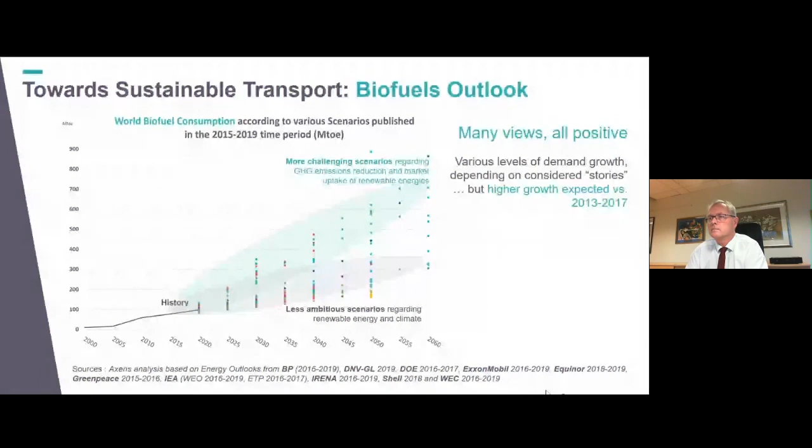That is one challenge on one hand, and global warming on the other. Keeping these challenges in mind, our eminent speaker in the earlier discussion highlighted that India is poised to become the third largest consumer of fuels in the coming decades, and needs to address these challenges I just mentioned. The government of India plans to increase biofuel production by 2030. At the same time, there's a strict target to reduce greenhouse emissions by around 30% in the next 10 years or so.

Some agencies have worked in this area and highlighted that only an energy mix combining fossil fuel with renewable fuels will be able to meet this demand in the next couple of years, or the next decade to come. If we look at different scenarios projected in the slide, even the most conservative scenario shows that renewable fuel will play a vital role, not just in achieving the energy demands of this country, but also in reducing the overall greenhouse emissions you normally have with fossil fuel based pathways.

Numerically, it looks quite encouraging. However, there are a number of challenges which some eminent speakers in the earlier discussions highlighted, cost effectiveness is one of them, feedstock availability and flexibility are other ones, and many more. To achieve these goals, it would definitely be required to have an approach or pathway which is innovative, cost effective, as well as sustainable.

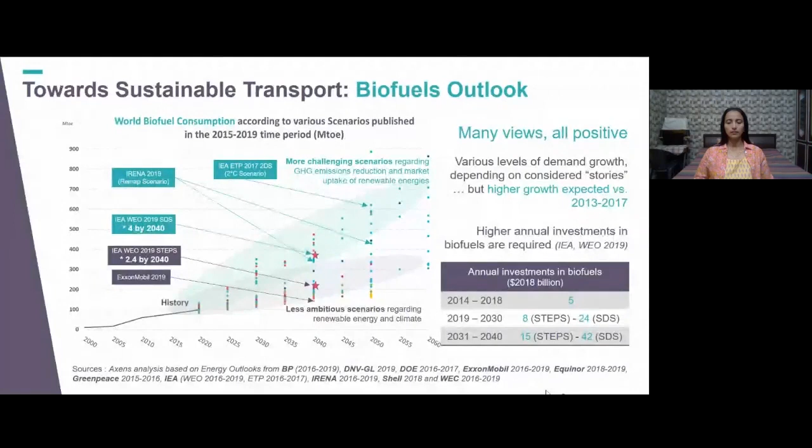If you remember during the last session, Mr. Das highlighted how important sustainability is for such pathways. So keeping these goals in mind, Axens has developed and expanded its bio portfolio over the last decade or so to provide a sustainable solution. It's important to have a solution which is sustainable.

This is a quick snapshot of Axens' bio portfolio, where in the next 30 minutes or so we will look at different pathways to utilize different feedstock, whether they are solid like biomass or liquids like used cooking oils, tall oil, or residue from the food industry or fish industry.

Now, if we begin from the top, we have two processes which produce renewable diesel and aviation fuel, which we call sustainable aviation fuel. The first of them is Vegan—this is a more traditional route, hydrotreatment of lipid feedstock into diesel and jet fuel, which is quite well known in the oil and gas industry. The second approach is the BioTfueL project, including Gasel. This is actually a thermochemical conversion of lignocellulosic biomass into liquid fuels like diesel, jet fuel, and some naphtha. This utilizes gasification and Fischer-Tropsch units to carry out this conversion.

Now, the third process that we'll look at today, and some of the speakers already highlighted during today's discussion, is lignocellulosic biomass conversion into cellulosic ethanol through the enzyme route, which is actually a biochemical conversion. We call this process Futurol.

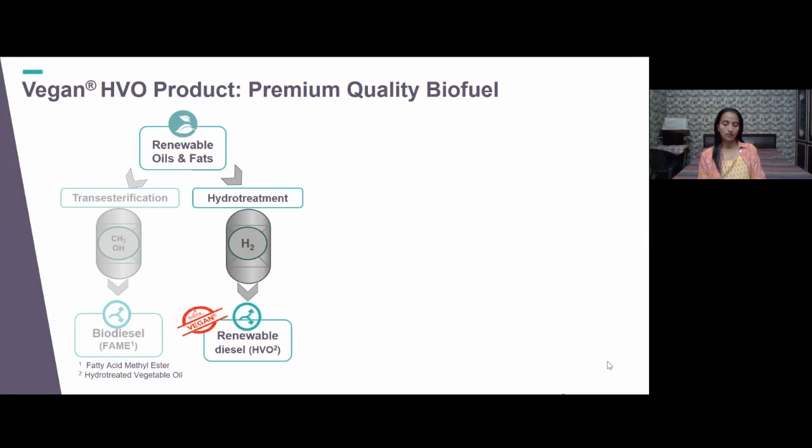Now, this is a big challenge because it means you cannot blend this diesel more than 5, 10, 15, or 20%. There is a limitation to it. And that is why this other route is gaining more prominence, especially in Europe and US, where a lot of refineries are switching from fossil fuel based pathways to biorefinery. This is one of the pathways which is quite proven, already commercialized, and very well known in the market, so there is a lot of know-how available. What it really does is the lipid feedstock undergoes hydrotreatment to produce renewable diesel like HVO, which is also known as hydrotreated vegetable oil.

Now, some of the quick advantages I would like to mention here: it is oxygen free. These are C16 to C18 paraffins, so a very similar molecule in terms of traditional diesel molecules. Then higher energy density because you are adding hydrogen into the process. And it has tunable cold flow properties. I think cold flow properties are quite important when we talk about commercial scale fuels, whether it is summer, winter, or Arctic diesel.

So traditionally in biodiesel you need to add some additives, but in this process, even just by changing the operating conditions, you have a finished product with the required cold flow properties. Finally, I'll not go into each of them, but I just want to say that higher cetane number is something that is quite useful here, because it brings a lot of value when you are blending it into a diesel pool that you already have.

So it's a very superior property that you get here. Now, quickly look at how that translates into chemistry and scheme of things. I'll not go into details, but I just want to highlight how we have made this approach cost effective.

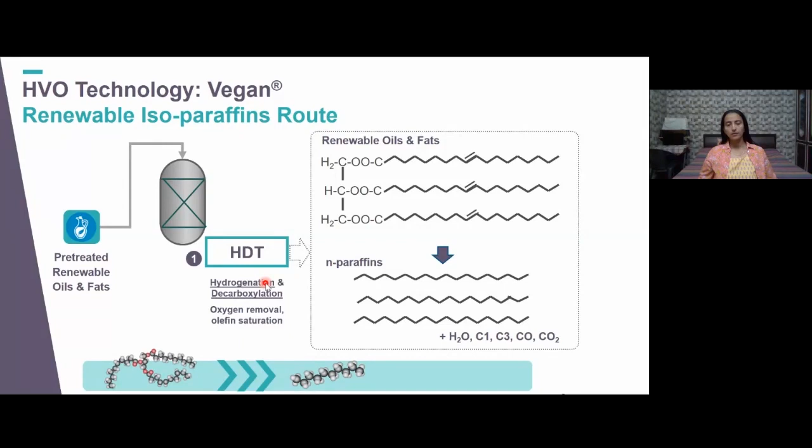Now, how does that translate into the scheme of things? You have a pre-treated renewable oil or lipid feedstock, like used cooking oil. You hydrotreat it in a hydrotreating reactor, then you have a hydrotreated oil. Now, because the melting point of this oil is more than 20 degrees Celsius, it doesn't fit the specification you need for aviation fuel or diesel, so you have to upgrade it further through hydroisomerization.

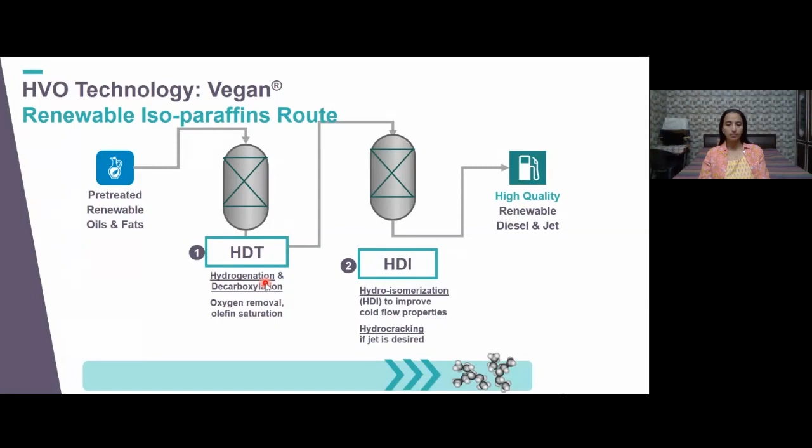Again, there are two approaches to it: one is hydrocracking and another is isomerization. We have chosen isomerization because it produces less yield of gases, which means you can maximize your yield for the main product. This way, again, it improves your OPEX and reduces your CAPEX.

Eventually, you get a product which is ready to use. It doesn't need any post treatment. You can straight away use it in the existing setup. So it's a drop-in fuel.

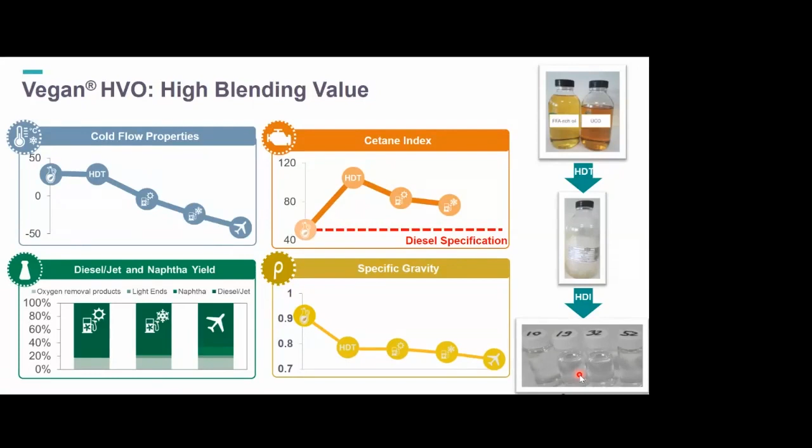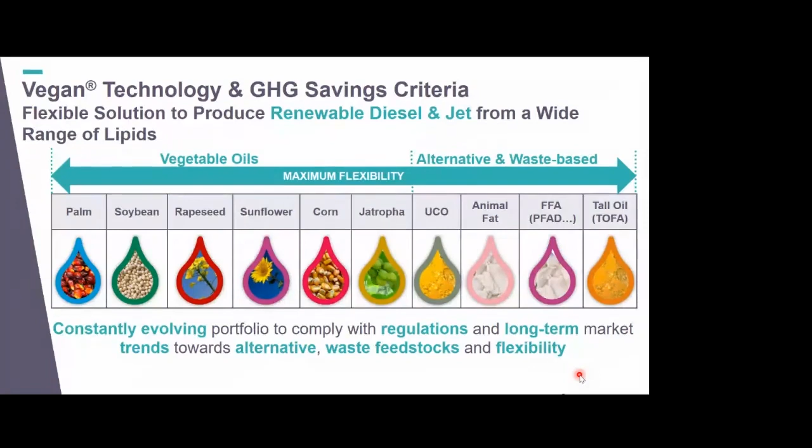Now, this is a quite important slide because this process is quite versatile in nature. What it means is you can use multiple kinds of feedstock, different feedstock available throughout the year, to produce different products: diesel, gases, or jet fuel. So it gives you a lot of flexibility. Even capacity flexibility is there, so you can pick and choose what capacity you want based on feedstock availability. So it's a quite flexible and versatile process.

In terms of our experience, one of our commercial references is at Total La Mède Biorefinery. This is in France. The important thing to note here is this is the only refinery, as per the press release by Total, that made profit for them during the lockdown period. So this tells you how this bio route can bring a lot of revenue for you.

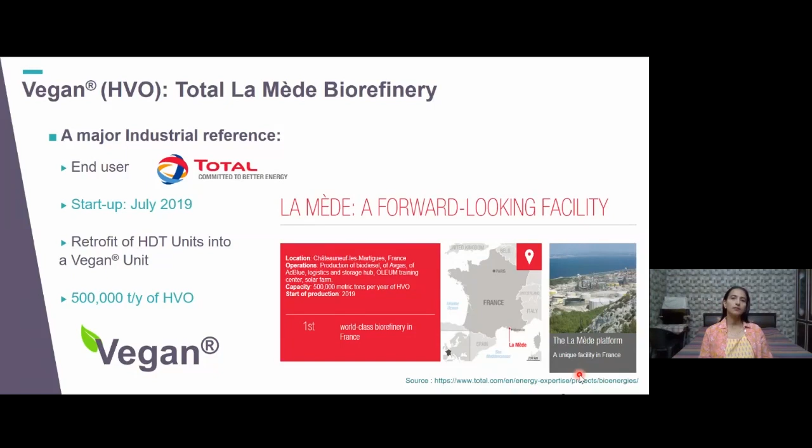At the same time, we had to consider that in Europe and US, they have a lot of incentives when they adopt such a route. Some of our other references are in Poland and very recently Repsol in Spain. So as I said in the beginning, this process is quite proven, quite well known. Only some modification needs to be required so you can use it in the existing setup. You can also consider co-processing, or you can put up a grassroots plant for this particular process.

Now, quickly moving on to the other process to produce renewable diesel and jet fuel, which is the BioTfueL project, including Gasel.

Now, I'm sure this is more relevant to fuel.

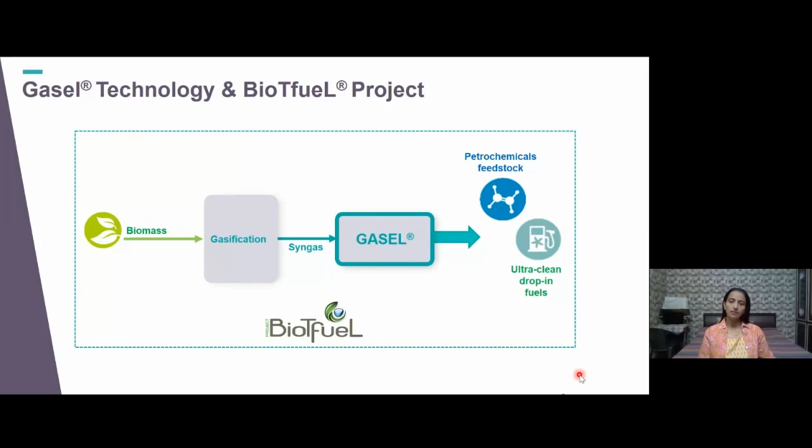It's a complete value chain from biomass conversion to liquid fuels. So what it means is it involves pretreatment, gasification, syngas purification, Fischer-Tropsch synthesis, and then upgradation of the waxes that you get from Fischer-Tropsch. Again, it's a very versatile process.

When I say that, I really mean it, because here you can use biomass. We are also exploring and testing the technology with waste feedstock. Coal and pet coke can easily be used. At the same time, if you have a choice, you can also use natural gas. Then you generate a syngas, which produces various kinds of feedstock and products like diesel, aviation fuel, and naphtha that goes into petrochemical feedstock. So it's again a very versatile project that we are talking about.

And in a nutshell, what BioTfueL really means is, you can see how extensive and massive this project is, because we are talking about more than 180 million euros of investment program for this project. Already more than 10 years of R&D effort has gone into development for this project.

We are using a partnership model. It's a consortium known as BioNext, and a partnership model in this area is quite common, where a lot of partners come in and bring their expertise to develop a process. So we have utilized the same, and BioTfueL is one of the end products of the same.

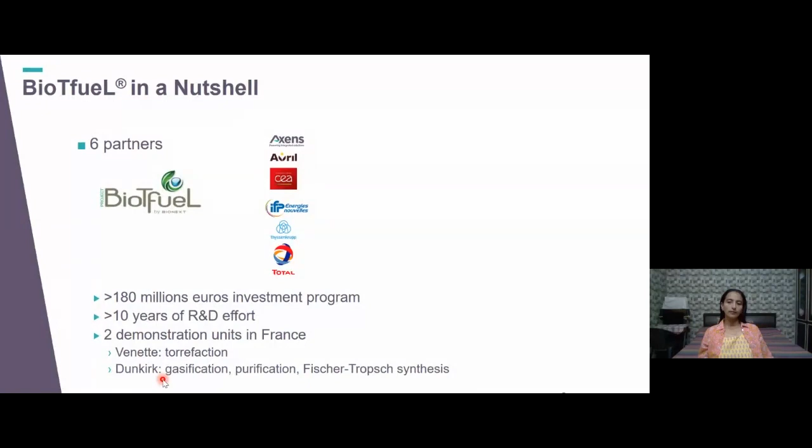These two demo plants are there to validate the technical and economical feasibility of this project. And through these two demo plants, the results are really good, and we were able to validate the results. Maybe in the coming times, you will see the commercial aspect of this technology as well. I mean, how that translates into the scheme of things.

You have biomass, you torrefy it, which is more like a mechanical drying. The intent here is to reduce the moisture up to a certain level. Then you have a pre-torrefied biomass, which looks more like coffee powder, just to imagine, it's a vague term. Then you take it to...

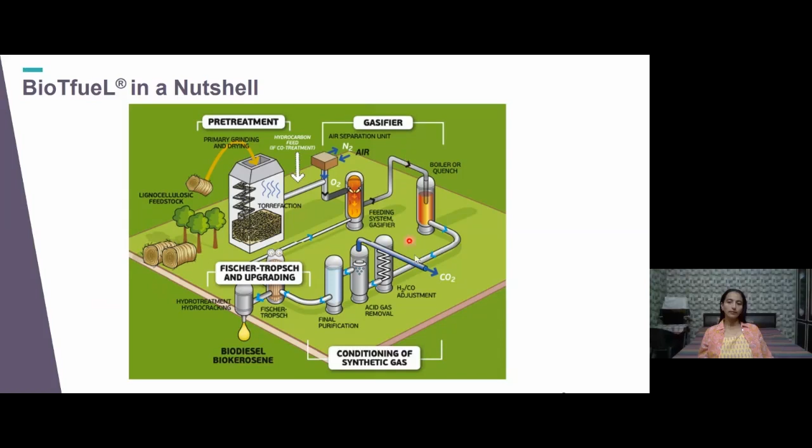the oxygen-fired gasifier. You produce a syngas. In the syngas, the next aim is to balance out the hydrogen to CO ratio, which you do through acid gas removal and final purification through catalysis or adsorbents. Then you take it to the Fischer-Tropsch reactor, where you produce wax to produce end fuels like diesel and jet fuel or naphtha. So this is the typical scheme.

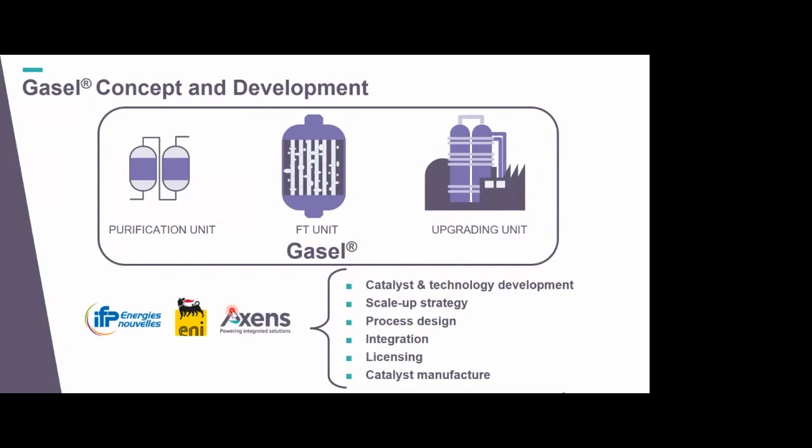I'm sure you must be wondering then what Gasel is, because I just spoke about BioTfueL. Gasel is actually the Fischer-Tropsch section. This covers purification of syngas, the Fischer-Tropsch reactor, and the upgradation of wax that you produce in the Fischer-Tropsch reactor. Again, this Gasel part of it was developed in consortium with ENI.

Now, how does that translate into the scheme of things? Well, Gasel actually utilizes a low temperature regime, which helps you maximize the wax yields. It's important to have wax because here we are targeting diesel and aviation fuel, most of it. And in case you want to target naphtha, that is also possible, and that can be adjusted through this hydroprocessing step, where you can mix and match based on what you really want as a product.

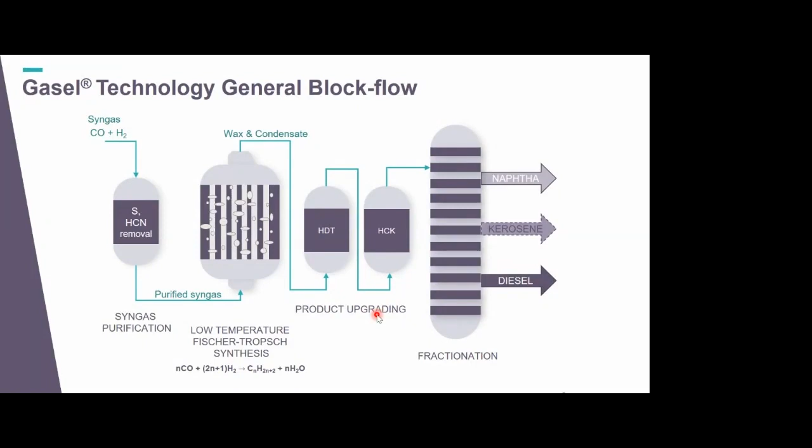Now, in terms of its properties, just to summarize the product you'll get, the products are fit to use, drop-in quality straight away. You can use them in the existing setup. No, they have no contaminants, no sulfur, no aromatics. Quite paraffinic in nature when I talk about diesel and kerosene, and meets all the required specifications for these fuels. At the same time, being premium fuel, that's one advantage.

Another advantage is it reduces greenhouse emissions up to 60 to 85%, based on the source of your hydrogen. That also depends on whether it is renewable hydrogen, blue, or gray hydrogen. So that varies between 60 to 85%.

Now, in terms of our experience, as I said in the beginning, we have 2 demo plants. On the left, you see a demo facility in France, Venette, and on the right side, it's downstream of torrefaction. This is a complete chain from gasification to fuel generation.

Now, the only thing to highlight here is you must be wondering why we set up a different torrefaction plant at a different site. The reason was we wanted to decentralize the whole system, because transporting biomass is quite expensive.

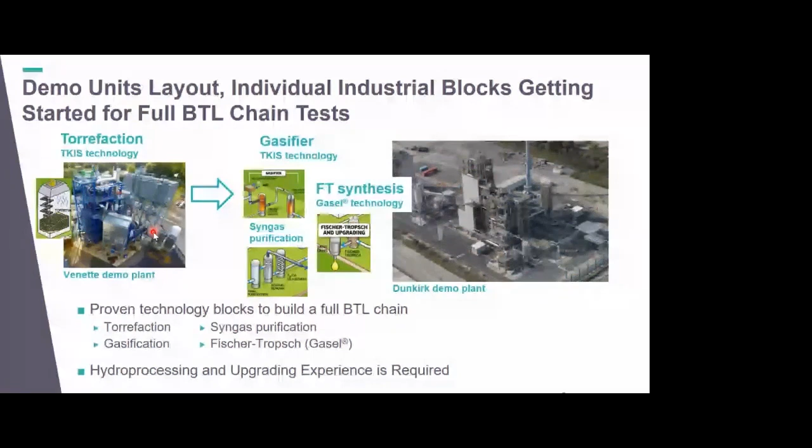So there is a flexibility that you can take this torrefaction unit to the site where you are extracting this biomass, torrefy it and convert that into powder. And you can then transport that powder to the conversion site, which is quite economical to transport, right? This torrefied biomass can be exposed to harsh conditions and can bear rain or wind or anything, so that's not a problem.

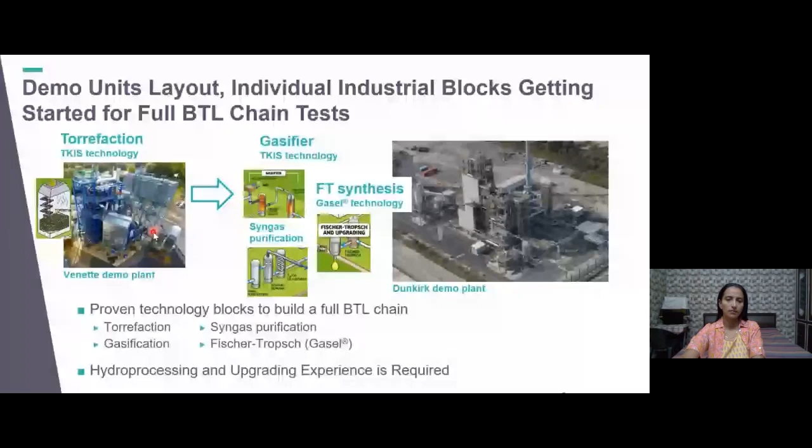Another, the third demo plant is for Gasel, that is in Italy, Sannazzaro. It has been operating since 2007 or 8. So this is just for the Fischer-Tropsch section. These are some pictures of our site just to show you how extensive the project is. It's not a small pilot scale plant, it's a very big demo facility with all the sections at a commercial scale.

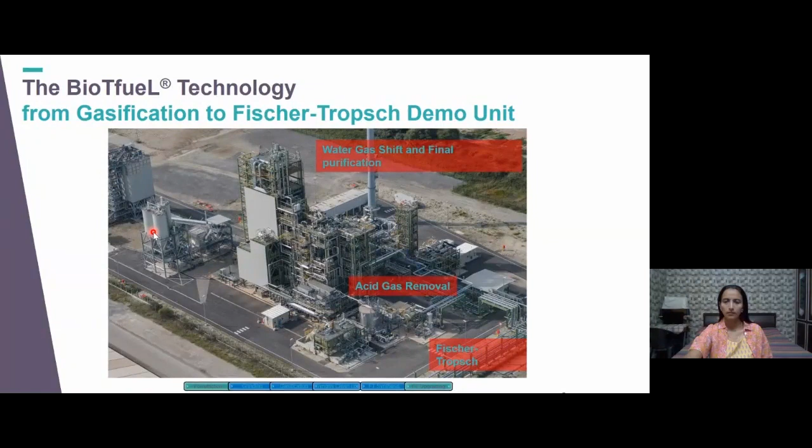This is about the BioTfueL project, including Gasel. I just forgot to say that, again, it's a very extensive and massive project, and a lot of research has already gone into developing this project.

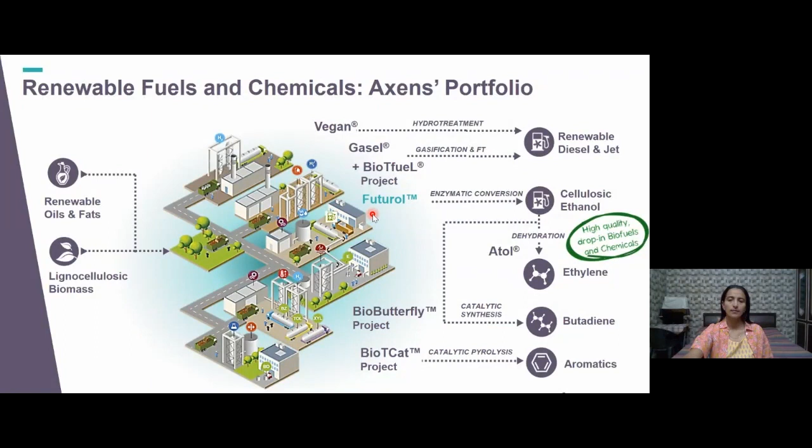Now, next, or maybe last but not least, the last process I want to show here is Futurol, which is biochemical conversion of biomass into cellulosic ethanol. Again, the intent here is to show you the latest updates about this process, because I'm sure a lot of you must have heard about it.

I just wanted to show you that, again, it's a very extensive project. We are talking about 90 million euros of investment just for the project, more than 10 years of R&D program, more than 12 R&D centers throughout France, as well as many partners. Again, it's a consortium - we have utilized the partnership model to bring different expertise together to develop this process.

And if I tell you in terms of timeline, it's quite long. In 2008, this consortium was built. In 2011, the pilot plant started operating. And in 2015, our demo plants are operating. In 2017, this process was commercialized to fit to use.

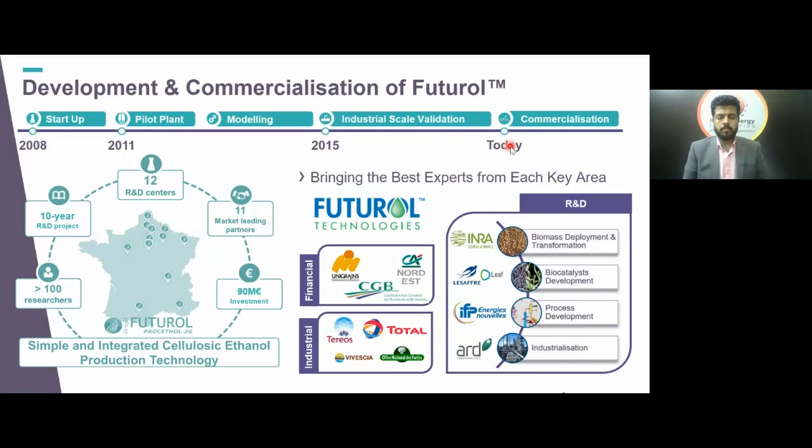Now, I'll not go into the chemistry, but I'll highlight the steps we have taken to make the whole process economical. Because no process, when you look at different pathways, is good or bad - it's about how much you can spend, and what kind of feedstock quality you have. Every process has its pros and cons. So here we have taken a lot of steps to make the process cost effective and to improve its economical feasibility.

The first step is pre-treatment. What we have done is, through the right operating conditions, we are able to extract maximum C5 sugars from hemicellulose. This translates into a very high or maximum yield possible for the ethanol. At the same time, the cellulose structure is not disintegrated - the cellulose stays there, which is later hydrolyzed in the third step. So this way we are able to maximize the yield of ethanol.

The next step is co-production of enzyme on site. This is just for economical reasons - this actually reduces the operating expenses or production cost by up to 15 or 20%. It's a big reduction when you do co-production of enzyme at site.

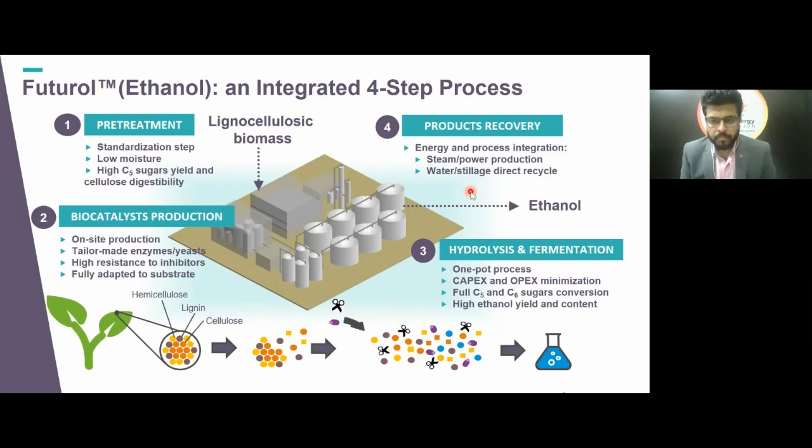Again, this is a very flexible process - you can use grassy residue, straws, woody biomass, as well as energy crops. You can use everything here, and it gives you a very consistent performance. Again, this is the same point as I discussed earlier, that we are doing co-production of enzyme, which actually reduces production cost by up to 15% on an annual basis.

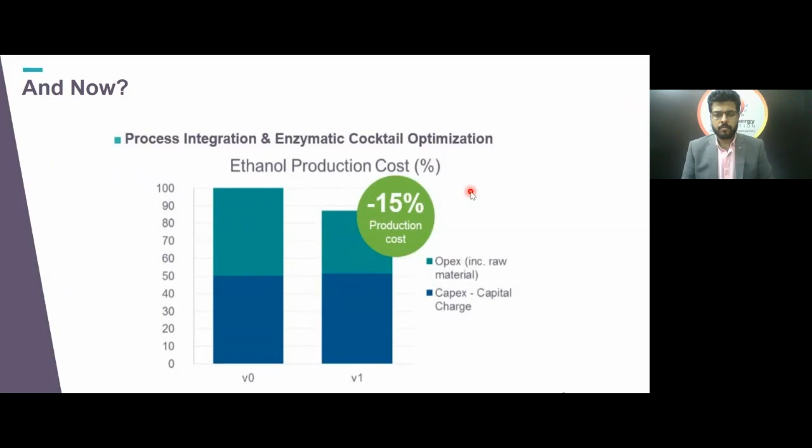Now, quickly look at our experience in this area. As I said in the beginning, the pilot plant is operating since 2011. The size is 1 dry ton per day. It's from biomass to ethanol, so it's a complete chain. And on the right side.

It's quite interesting, you must be wondering, then, if we have a pilot plant, why we have set up two demo separate plants for biomass pre-treatment and enzyme production. The reason was, during the initial phase of the research, we realized that for better economical feasibility of this process, it's very important to validate these two steps at a commercial or industrial scale.

And that is why you can see the pre-treatment process is very big. We are talking about 100 dry tons per day of biomass pre-treatment, and 100 meter cube of liquid volume for enzyme production. I can confidently say these are some of the biggest demo plants you will see for this process in the world. This has really helped us make the process cost competitive and economically viable and sustainable.

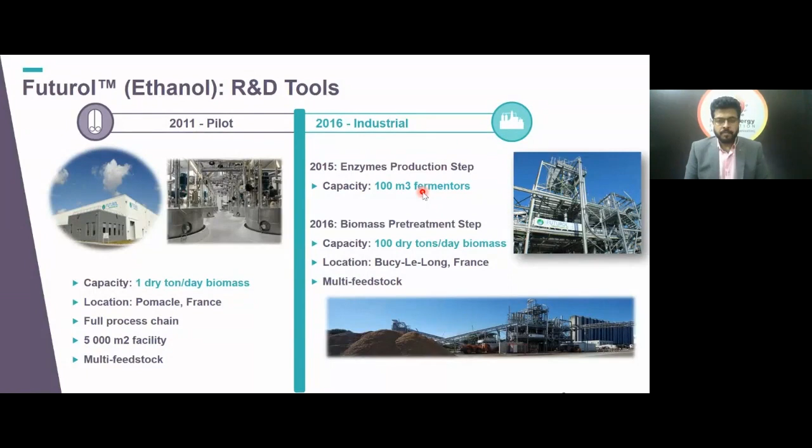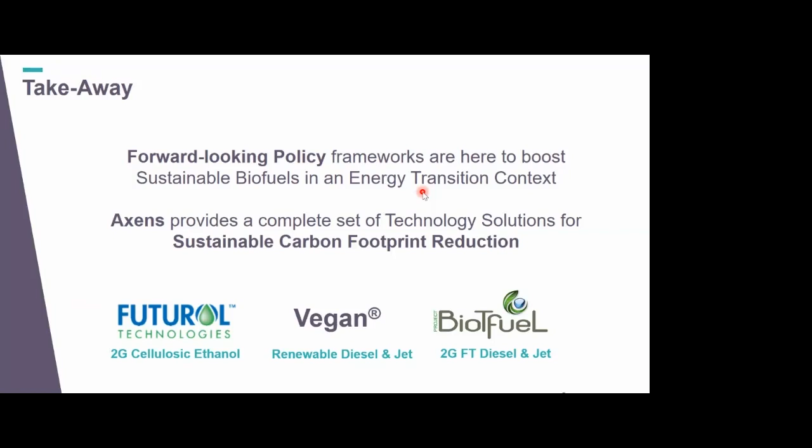So this is it, that brings me to the end of this presentation. I'll finish here by summarizing what I have just said. In today's time of energy transition, industries are exploring different pathways. What we foresee is that in a short span of time, it will be a combination of pathways. It will not just be ethanol, it will not just be diesel, it will be in conjunction with renewable hydrogen, ammonia. All these processes will combine together, and this will help us meet our future energy demands.

At the same time, it will help us reduce the overall emissions or carbon footprint, which would also require encouragement from a policy perspective, because these policies are already there in US and Europe, and this kind of policy support will definitely help us spearhead such technologies into the market. Innovation is another thing that will really be needed in this area, along with flexibility of the process as well as investment. And that is where Axens is here to provide you the complete set of technological solutions in the form of Futurol, Vegan, and BioTfueL to achieve a sustainable transportation system as well as sustainable chemical growth.

So that is it from my side. I'll be happy to take your questions in the next minutes or so.

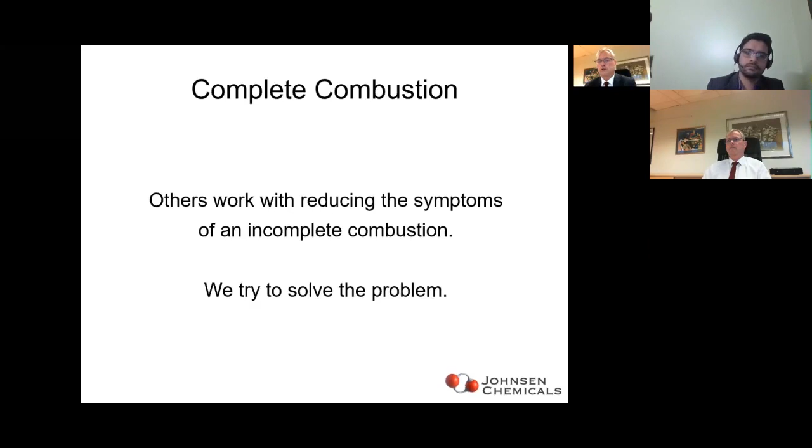From a complete combustion, you will find an emission of carbon dioxide and water. If you have any other emission, you have an incomplete combustion. Instead of cleaning the emission from an incomplete combustion, we improve the combustion process and reduce the creation of emission.

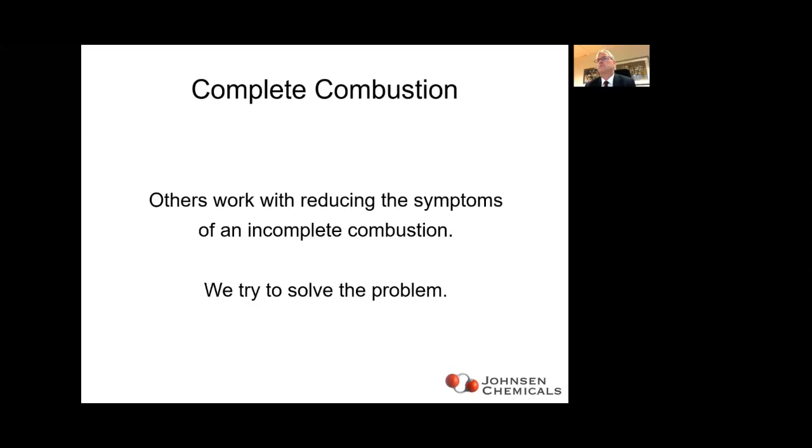We have developed a combustion catalyst for solid fuel. The active ingredient we use is a manganese complex. The product is environmental friendly, it's liquid, and the normal dosage is 1 liter per ton. The safety data sheet has defined the product as irritating.

The manganese complex is an oxygen scavenger that attracts all available oxygen to the surface of the fuel. All available oxygen is utilized in this improved combustion process, so we create carbon dioxide instead of carbon monoxide.

This will again reduce the level of oxygen in the boiler. The reduced level of oxygen reduces the creation of sulfur dioxide, as there is not enough oxygen available to react with the sulfur.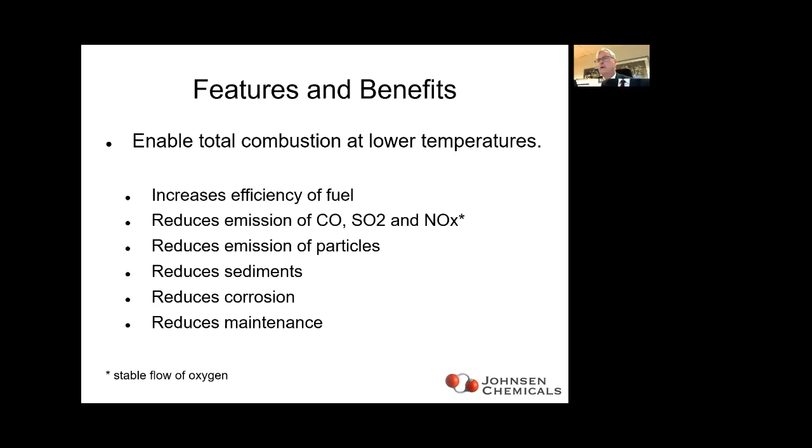Reduced sediments and reduced corrosion will increase the time between each shutdown for maintenance.

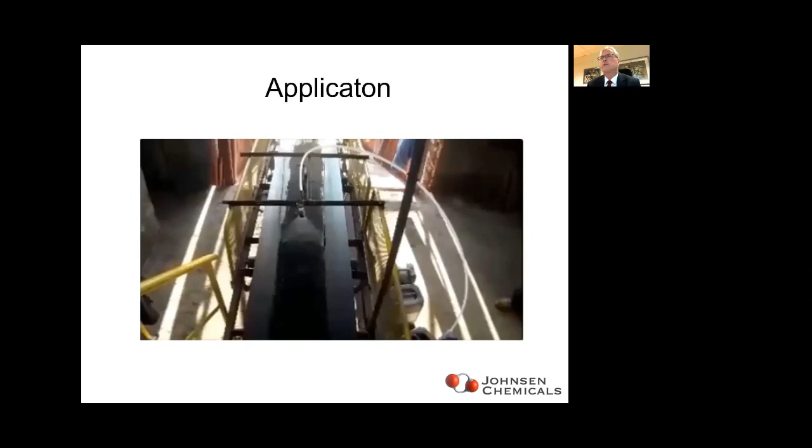This is a picture from an application in Poland. We spray the combustion catalyst on the fuel on the conveyor belt before it goes into the boiler. The cost of this installation was less than $1,000.

Here are 2 pictures I took for fun from a boiler in Poland. It's the same inspection hatch with 1 hour difference, and you can optically see the difference after 1 hour.

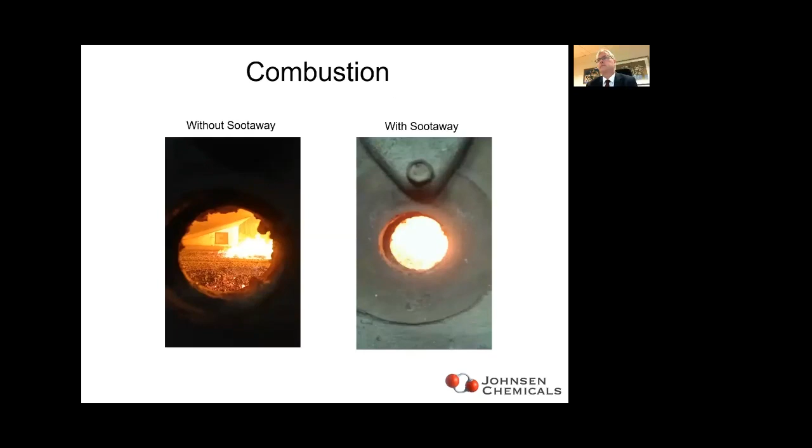Now I have an example from waste to energy in Norway. This is Sarpsborg Energy, built in 2009. They have 2 Energos boilers that burn 5 tons of waste per hour, and they deliver 60 tons of steam at 22 bar and 220 degrees Celsius.

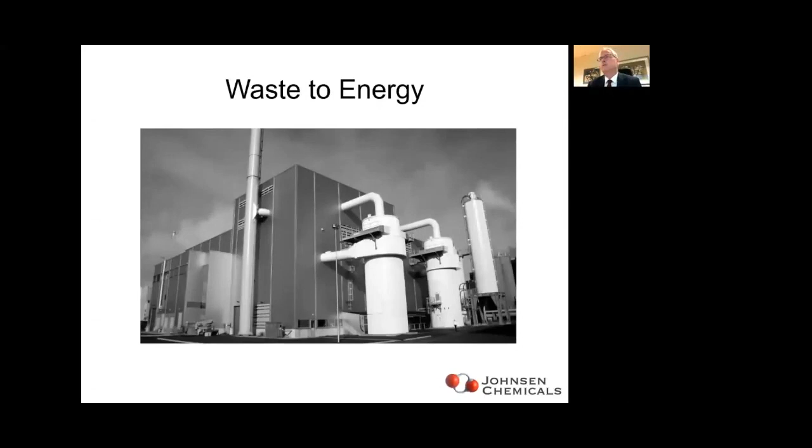These are the same power plant, showing the emission over time. The left picture is the reference boiler, while the right picture is our boiler. The red line is NOx, the green line is sulfur dioxide, the blue line is carbon monoxide.

You see at the end of our boiler's data, we had a short stop in dosing, and the emission came up again.

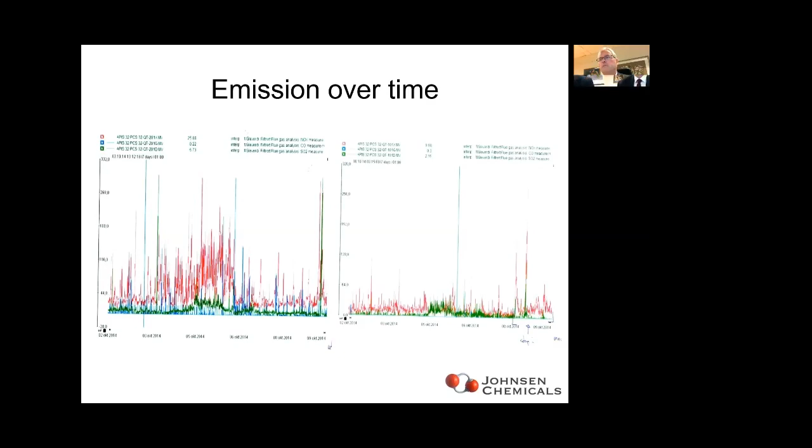Summary for waste to energy from this trial: we found that carbon monoxide was reduced by 84%, nitric oxides were reduced by 58%, and sulfur dioxide was reduced by 67%.

As sulfur will never disappear, we found that the sulfur content in the bottom ash was increased by 16%. We saw that fuel efficiency increased, and after this trial there was a scheduled maintenance of the boilers.

With the reference boiler, they had to send in people with compressed air hammers to remove the sedimentation, while in our boiler, all the sedimentation had let go of the wall and was lying on the bottom.

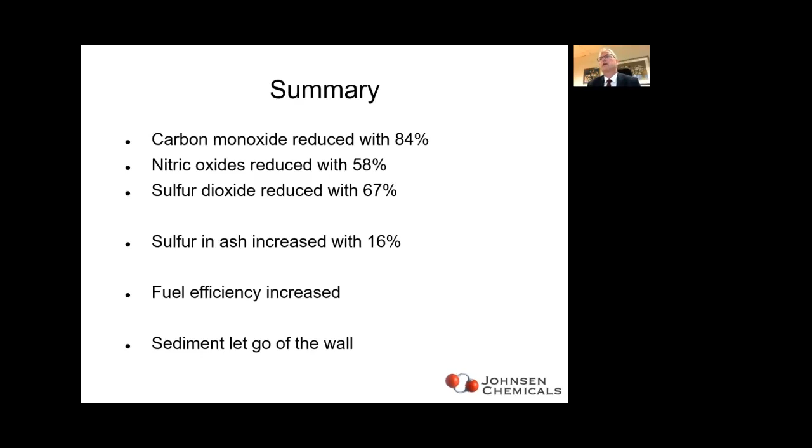I will also show you some examples from biomass. Here is one from a furniture factory in Germany with a focus on emission, and they found a 60% reduction of carbon monoxide, 55% reduction of sulfur dioxide, and 50% reduction of particle matter.

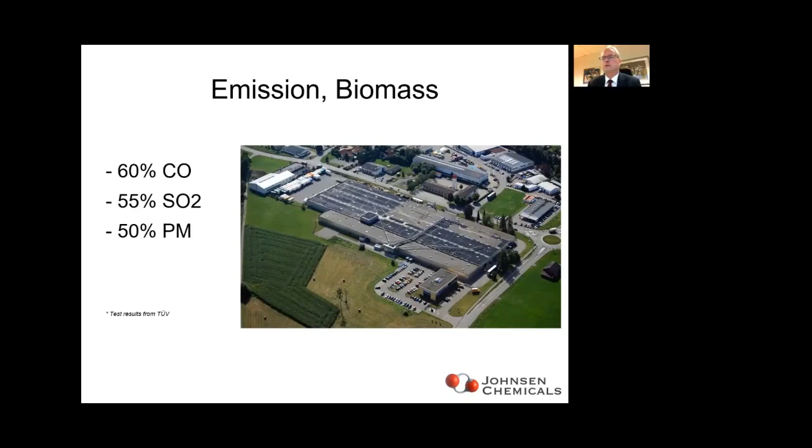All the results here are from a TÜV report. We had a fuel efficiency test on biomass - a university report from Opole in Poland on a boiler burning pellets - so that the fuel consumption was reduced by 30%.

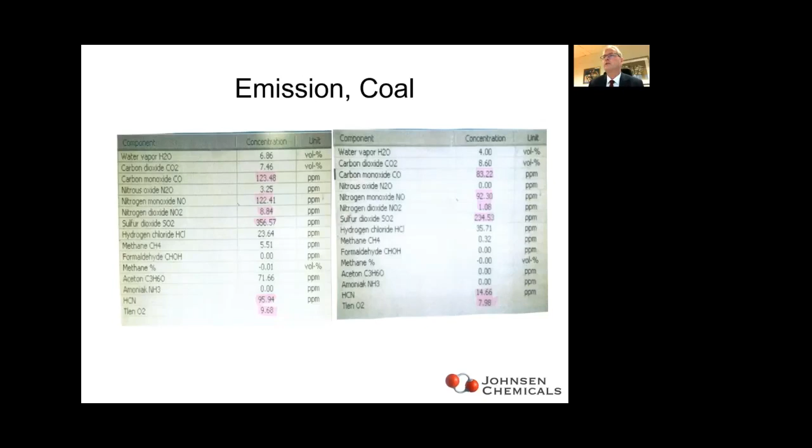We asked the University of Wroclaw, which performed this trial, to study carbon monoxide, sulfur dioxide, and NOx. But in their final report to us, they also commented that the emission of formaldehyde, acetone, hydrocyanic acid, and hydrochloric acid reduced significantly and was close to zero.

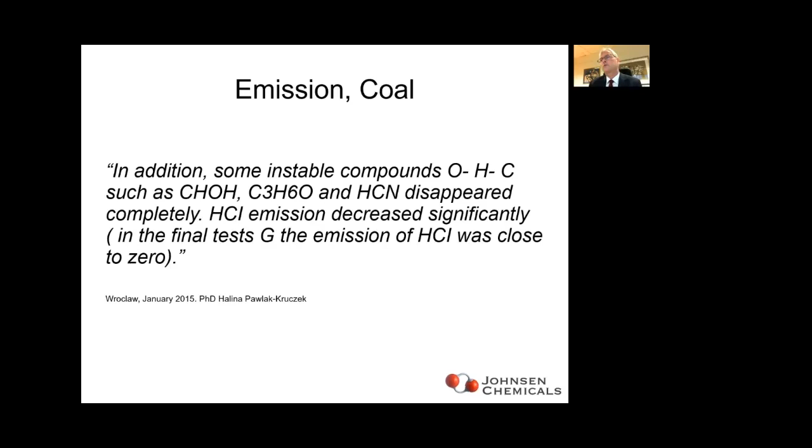Summary of the performance from our combustion catalyst: we reduce the creation of carbon monoxide and increase the creation of carbon dioxide, which will increase the heat release. We reduce sedimentation on the heat exchanger, which then will increase the heat transfer. Both of these items will increase fuel efficiency.

It will also reduce the level of oxygen in the boiler, which then again will reduce the creation of NOx. It will reduce the creation of sulfur dioxide and reduce the creation of particle matter, and this will improve the emission from your boiler. In addition, the reduced creation of sulfur dioxide and reduced creation of hydrocyanuric acid will reduce the corrosion in your boiler.

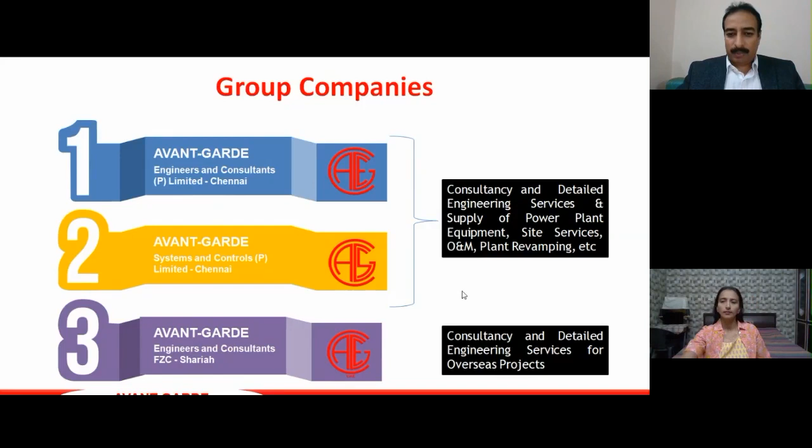Before going into the detailed presentation part, I would like to introduce our company for about 5 minutes. From Avant-Garde, we have 3 sub-companies: Avant-Garde Engineers and Consultants Private Limited and Avant-Garde Systems and Controls Private Limited, both of which handle all the consultancy and engineering services for our Indian projects. And we have Avant-Garde Engineers and Consultants Sharjah, where we do all our overseas projects.

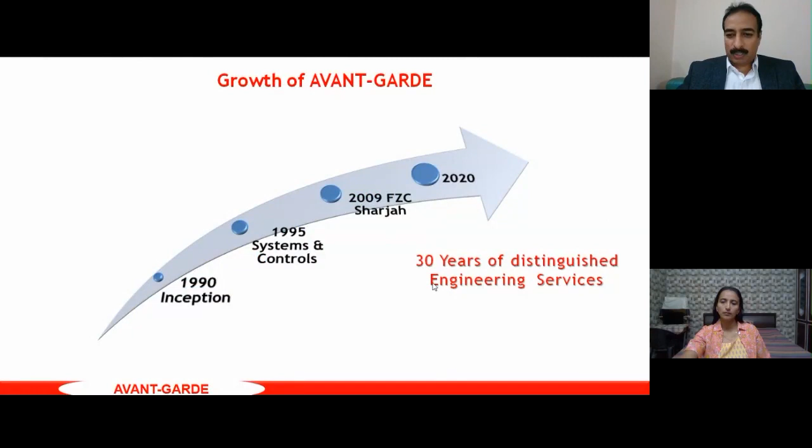We started in the year 1990, and now we are in 2020, so we have completed almost 30 years of our engineering services. We have 4 founder directors who had very wide experience in BHEL, working there for about 15 to 20 years before they started our company. We have wide experience, especially with respect to boilers, power plants, and waste to energy systems. All our directors have achieved the Lifetime Achievement Award, and especially Mr. Ragothaman has got the Lifetime Achievement Award for his work in waste to energy.

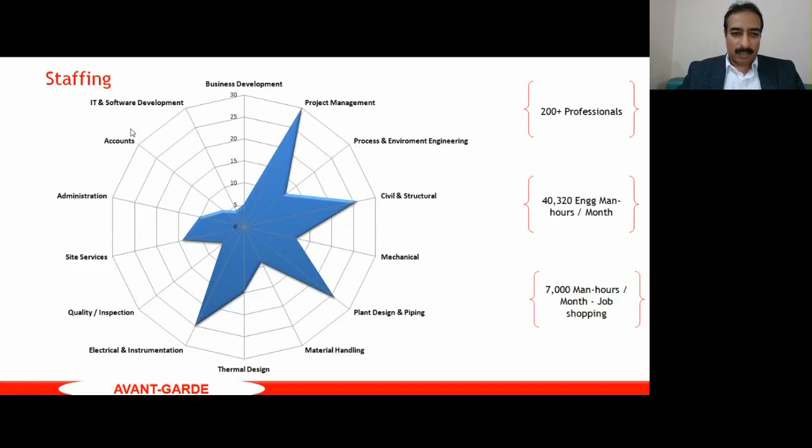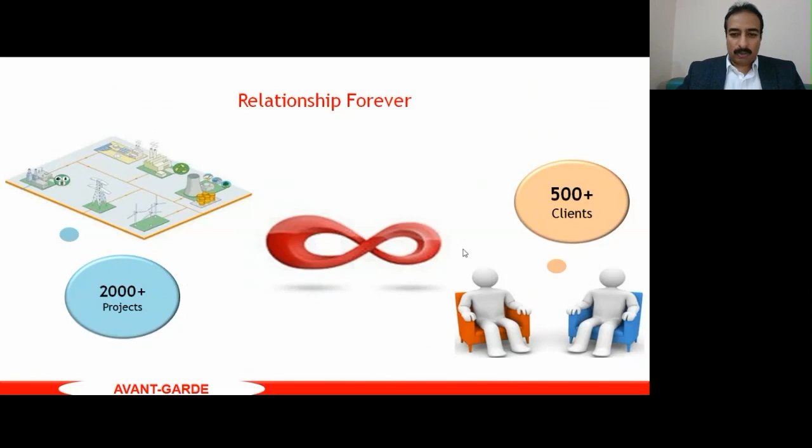We are an ISO 9001-2015 company, accredited by the Consultancy Development Center, and we are one of the only consultants in India to have the S stamp. We have around 200 plus professionals in various disciplines to handle most of the process plants and power plants. We have carried out more than 2000 projects with 500 clients, so most of our projects are repeat projects, and we have done projects in more than 40 countries across the world.

Our main area of business is consultancy for power plants, whether in terms of cogeneration, CPP, IPP, biomass based power plants, municipal solid waste power plants, waste heat recovery, or gas engine exhaust type power plants. Any type of power plant, we are involved in that.

We also design boilers, because all our directors are ex-BHEL and have very good experience in boiler design. So we also design boilers and provide them to companies who don't have in-house boiler design capability - mainly grate fed boilers, atmospheric fluidized bed boilers, waste to energy boilers, waste heat recovery boilers, and vinasse-fired boilers, which use the effluent from distillery plants. This is a critical, highly polluted effluent coming from the distillery plant, and we have the technology to efficiently dispose of that waste.

Next, we also supply certain critical components in the boilers. Apart from that, we do a lot of sugar plant process consultancy, consultancy for bio-CNG plants, consultancy for distillery and ethanol plants, and consultancy for wastewater treatment and electricity plants. We have also done a lot of solar PV based power plants and solar thermal power plants as well.

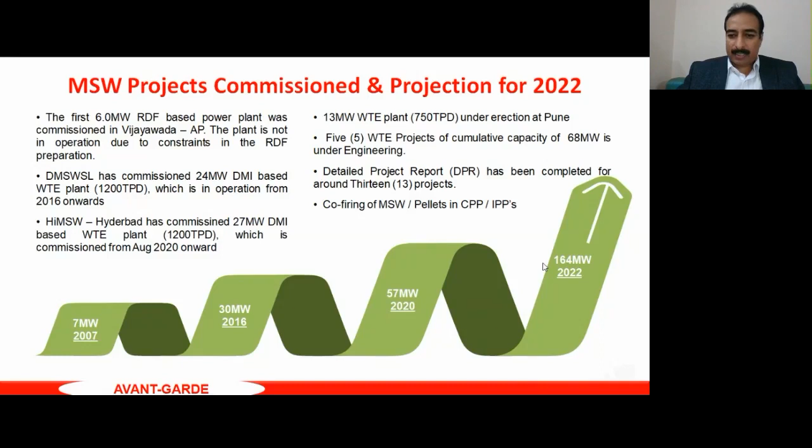Then recently we have commissioned the Hyderabad MSW based project, which is around 27 megawatt, same direct mass incineration based waste to energy plant, firing 1,200 TPD, commissioned from this year August 2020, and it is in operation as of now. So in 2020, as of now, we have commissioned around 57 megawatt, and with the available projects in hand, in 2022, we will be commissioning totally 164 megawatt of power. Many other clients are right now in touch with us, and we expect this to go up further.

So now coming to the incineration topic. Prediction as per Indian scenario is there is 62 million tons per annum of MSW available. Out of it, goes out to 1.7 lakh tons per day of MSW, out of which 90% of the waste is being collected, and the remaining 10% remains as uncollected waste.

From the collected waste, 20% of the waste is now being processed, either in terms of composting, biogas generation, or incineration route. Almost 20% of the waste is being processed, and the remaining 80% of the waste is dumped in the open dump yard, creating a pollution hazard.

If you come to the power generation potential, with the available MSW, we have a potential of around an average power of around 2000 megawatt, whereas the present power generation from MSW is only 60 megawatt.

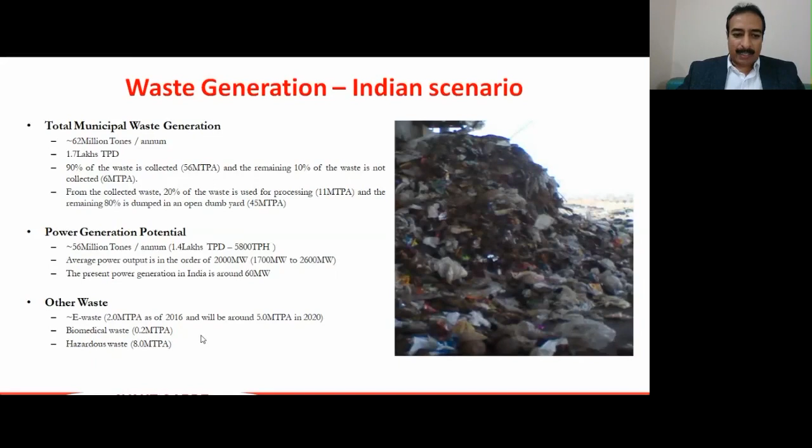Then other waste like e-waste, biomedical waste and hazardous waste, these should not be combined with municipal solid waste. These have to be handled separately. Added to that, the construction waste also should be handled separately.

So the various conversion technologies available today can be broadly classified into two: one is biological process technology, and next is the thermal conversion technology. The biological processing composed of composting, biomethanation, etc. And the thermal route, it is incineration, gasification, pyrolysis, and pelletization. These are the various technologies available.

This incineration handles the mixed waste. It can be dry waste, wet waste, whatever waste is available, the incineration can handle. Whereas gasification and pyrolysis requires a certain pre-treatment before letting it into this system. And pelletization also requires pre-treatment to produce RDF in terms of pellets, fluff, or maybe various other forms.

So, out of these various technologies available, how to select a technology? We have to analyze the following steps.

One, the technology you select should be flexible enough to handle the wide change in MSW quality. This is one of the major constraints in MSW based energy generation, because unlike other power plants, like coal, properties are almost fixed depending on the mines or imported fuel. Similarly, biomass like bagasse, rice husk, or other agricultural residue have properties that are more or less fixed. But MSW has a wide range of quality, ranging from 800 kilocal per kg up to around 4,000 to 5,000 kilocal per kg.

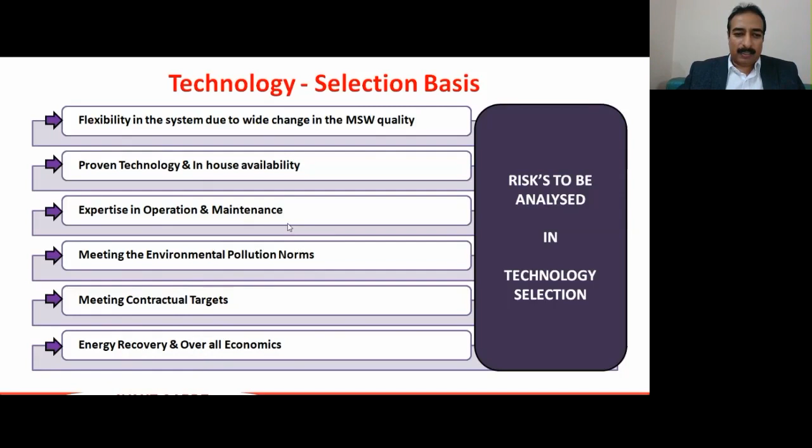Analyzing all these things, with the present available technology for commercial production, incineration is one of the best technologies available. Incineration is nothing but burning of the fuel in a controlled atmosphere in the presence of oxygen. Incineration technology is divided into two: one is burning the fuel on as-received basis, and second, burning pre-treated waste by means of pre-treatment, where you go through a set of various treatment processes, and then finally take the fuel to the boiler, which you call RDF.

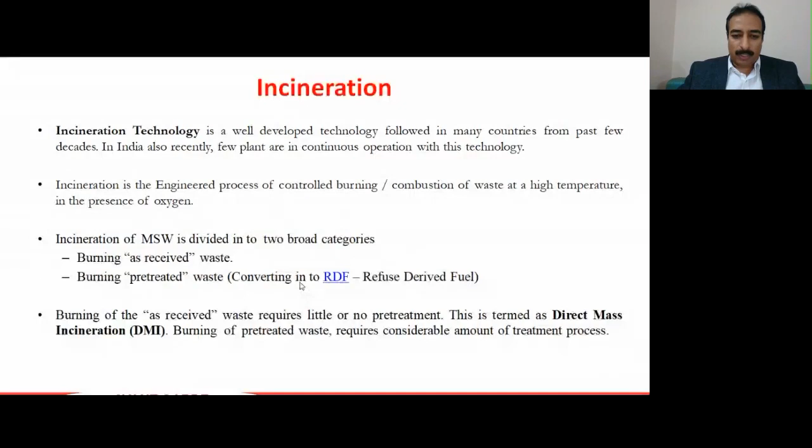RDF also has so many varieties. If you see the ASTM classification, you have RDF 1 up to around 7 or 8 classifications available. Burning of as-received waste requires little or no pre-treatment. This technology, which we call direct mass incineration, is what we have followed in all of our projects, requiring no pre-treatment or very little pre-treatment.

The advantages of incineration plants are numerous. I have listed a few of them. One, it addresses three types of environmental issues in one stroke: pollution due to open dumping, effective land use, and environmental impact because of fossil power plants.

Depending on the power generation from MSW based power plants, to that extent you can reduce power from fossil fuels, thereby reducing the environmental impact. Second, there is a volume reduction to an extent of 85 to 90% of the MSW.

When you burn MSW in the boilers, some amount of ash comes as a byproduct, which has to be disposed. When you compare the volume of the MSW versus the byproduct, it is around 90% reduction - there will be only 10% left out, which has to be disposed. The various disposal options will be covered in the further slides.

Third, waste reduction and destruction is immediate - a long wait is not required. Once you collect the fuel, MSW, from various places, you directly dump it in front of the boiler, and then immediately put it in the boiler and produce power. So the waste to destruction is immediate, and you need not have a long wait.

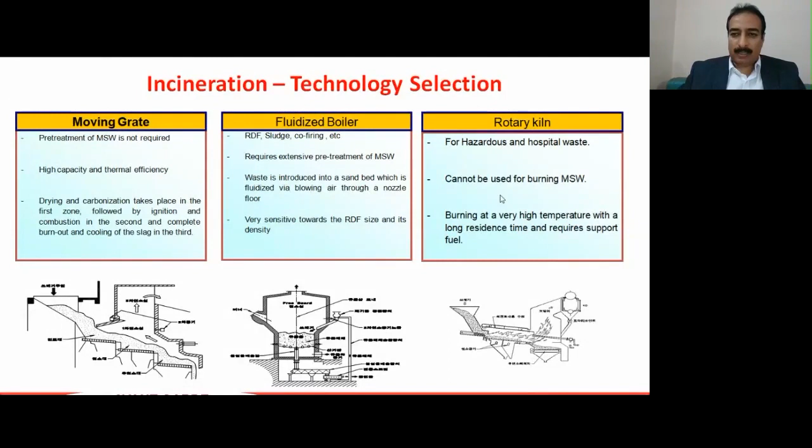Whereas fluidized bed boiler cannot be used if it is a direct fuel. It is difficult to use. So when you go for a fluidized bed boiler, necessary pre-treatment is mandatory. Normally these fluidized bed boilers are used for highly pre-treated RDF and for co-firing applications. Rotary kilns are normally used for hazardous waste, hospital waste, and industrial waste. For all those things, this rotary kiln technology is used.

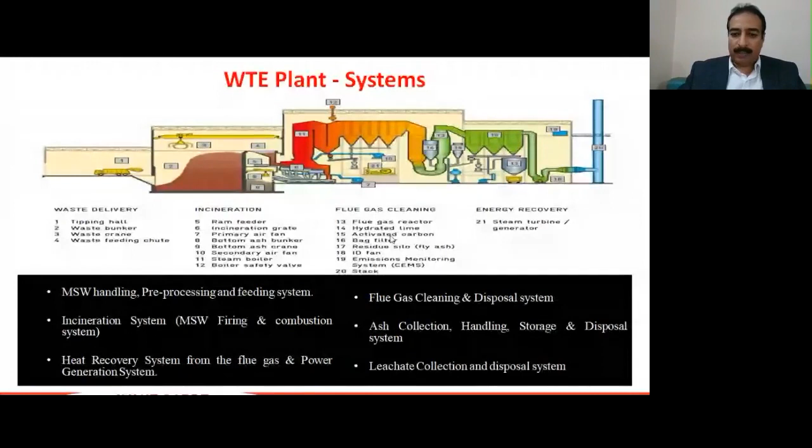Next is a flue gas cleaning system. Once the flue gas comes out of the boiler, it has to be cleaned to an acceptable level listed by the Pollution Control Board. Then you have ash collection, handling, storage and disposal system, and you have the leachate collection and disposal system. These are the various systems available in the waste to energy power plant, an incineration-based waste to energy power plant. So these are some photos.

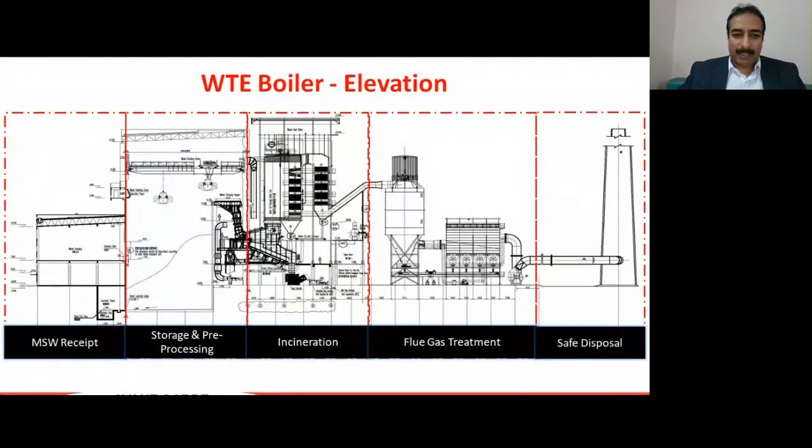There will be two grab cranes installed in that. One grab crane has an exclusive function of shuffling the fuel in the pit, and by another grab, you take the fuel from the pit and put it into the boiler for further processing.

So, functions of the pit. The pit forms a very important, vital role in the overall performance of the whole system. One, to reduce the surface moisture, because depending on the season - whether it's a rainy season or any other season - the moisture in the fuel will be high. For example, when you take waste from the marketplace, from vegetable markets, fruit markets, flower markets, the moisture will be very high.

So directly you cannot fire that high moisture fuel into the boiler. You store the MSW in the pit for about 5 to 10 days, so that because of that fuel head, the fuel gets compressed and the leachate comes out of the system and gets collected. Depending on the number of days of storage and the storage head and volume, there is a possibility of leachate collection to an extent of 5 to 20%. So one purpose is to reduce the surface moisture.

Second, to homogenize the incoming fuel, because since the MSW you get from various places with varying calorific value or varying nature - when you put it in the pit for about 5 to 10 days and keep shuffling it, the calorific value of the fuel becomes more or less the same. Thereby it gives better burning characteristics in the boiler without any major load fluctuations.

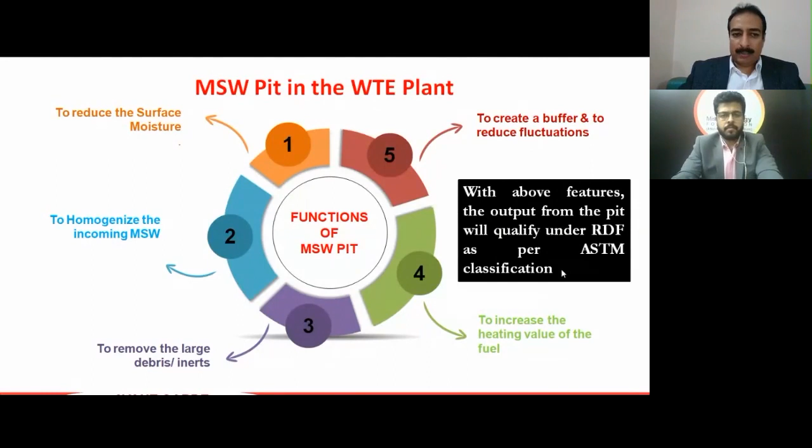Then, to increase the heating value of the fuel - as I explained, because of the reduction in moisture, the leachate collection, making a homogeneous mixture, and removing large debris and inerts - the calorific value of the fuel gets increased. It also creates a buffer to reduce fluctuation in the boiler. With these activities in the pit, the MSW from the pit classifies under RDF 1 and 2 classifications, because you are reducing the moisture, making the fuel homogeneous, and removing large inerts and large size particles. By doing all these things, this is qualified as an RDF under ASTM 1 and 2 classifications.

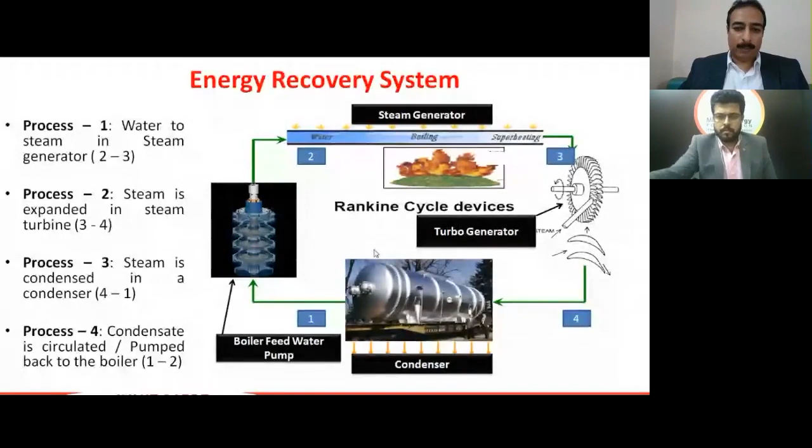When you see the history of the steam cycle, higher the pressure and higher the temperature, more is the power generation, which is true in case of municipal solid waste as well. But there is another disadvantage in doing so. Normally, because of the characteristics of the fuel, we are forced to operate the waste-to-energy plant at lower parameters.

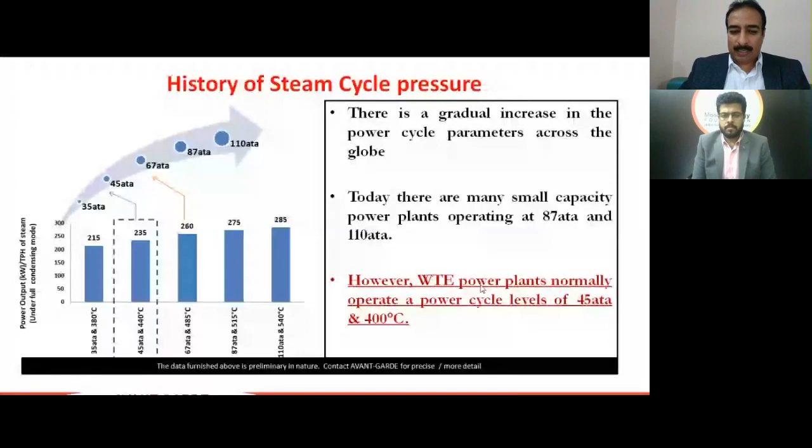We are forced to design the waste-to-energy plant with 45 ATA and 400 degrees centigrade. There are technologies available to go up to a standard pressure level of 110 and 540 degrees, by using a very expensive superheater material, but that is currently difficult to get in India. Maybe in the future, the same technology will be available in India also.

But currently, based on the in-house technology available, people go with 45 ATA and 400 degrees centigrade. The selection of boiler parameters depends on the capacity of the power generation unit, whether it's 5, 10, 50, or 100 megawatts. Depending on that, the cycle parameter varies. Then, depending on the type of power plant under consideration and the general characteristics of fuel and ash, the pressure selection changes.

When you want to operate the power plant with an existing unit, for better flexibility we may go with the existing plant pressure and temperature. Then there's initial investment, cost economics, and limitation in the technology followed. Because of these three reasons, we are limited to 45 ATA and 400 degrees centigrade.

Coming to the characteristics of municipal solid waste, I have given a comparison of the characteristics of Indian coal, biomass fuel like rice husk and bagasse, versus the characteristics of municipal solid waste. If you see that one-to-one comparison, which I have marked in red - sodium oxide, potassium oxide, SO3, chlorine, and initial deformation temperature - there is a lot of difference between other conventional fuels and municipal solid waste.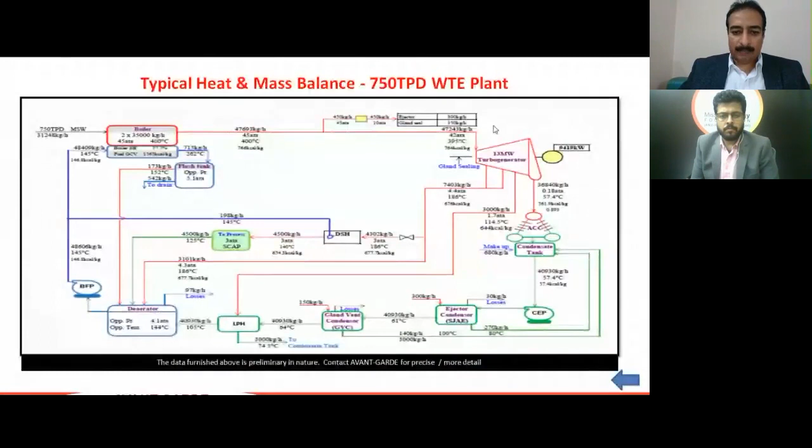And very soon, in India also, they are going to revise the rules similar to the international standards.

So to achieve the pollution norms as stated in Solid Waste Management Rule 2016, we have to go for an extensive gas cleaning and disposal system. Since you are burning the as-received waste, there are a lot of plastics involved, and there are dioxins involved in the system. There is high temperature dioxin and low temperature dioxin. Then you have NOx in the system, you have HCl, SOx, heavy metals and dust. These are the various pollutants present in the flue gas.

So to reduce the high temperature dioxins, the Solid Waste Management Rule talks about maintaining a furnace temperature of 900 degrees centigrade for not less than about 2 seconds. This you have to maintain in the furnace so that the disintegration takes place. High temperature NOx you can avoid by using this, and for NOx you go for an SCR and SNCR system to control it.

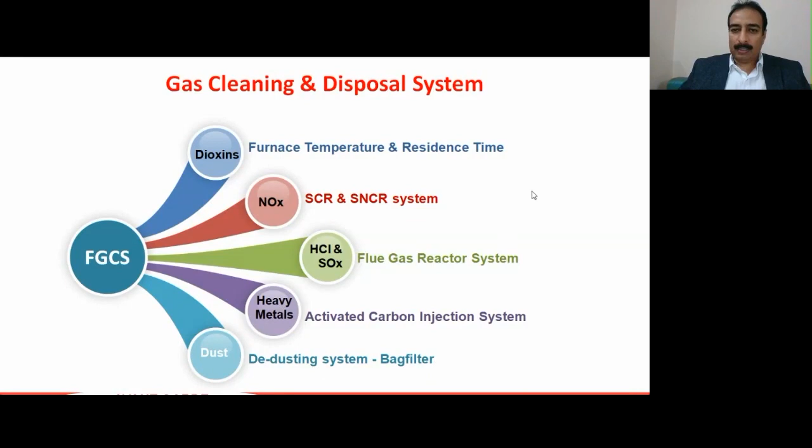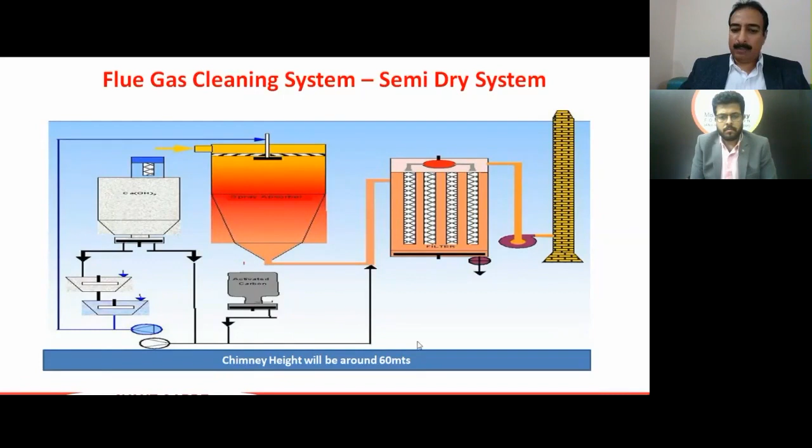Then this system, which we have followed in all of our plants, is the semi-dry system, where you have lime mixed with water, made as a slurry, and sprayed in a spray absorber where it contacts the flue gas and reacts. You get reasonably clean gas as per the pollution norms, and it is further treated in the bag filter so the outlet norms are maintained as per the pollution requirements. The chimney height will be around 50 to 60 meters depending on the incoming fuel properties.

Then ash: you have bottom ash generation and intermittent ash from the heat transfer surface, and downstream at the bag filter you have ash collection. The ash collected in the grate will be coarse ash, the ash collected in the bag filter will be very fine ash, and below the heat transfer surface it will be a combination of fine and coarse ash.

So this ash can be disposed of in construction fill areas or low-lying areas, used for landfill filling, for road construction, for non-load-bearing pavement block preparation, for landfill cover, and some percentage is mixed into cement block production. These are the various uses of the ash residue.

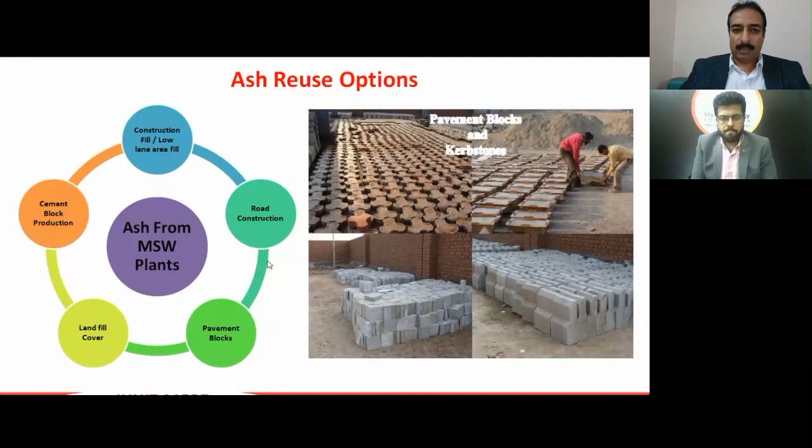Then another major part is leachate collection. Depending on whether it's dry season, rainy season, or other climatic conditions, the collection of leachate varies from 5% to almost 20%. That leachate is collected into a leachate pond, and further treatment is carried out. There are many types of leachate treatment available: one is RO-based system, and second is biological treatment followed by RO system.

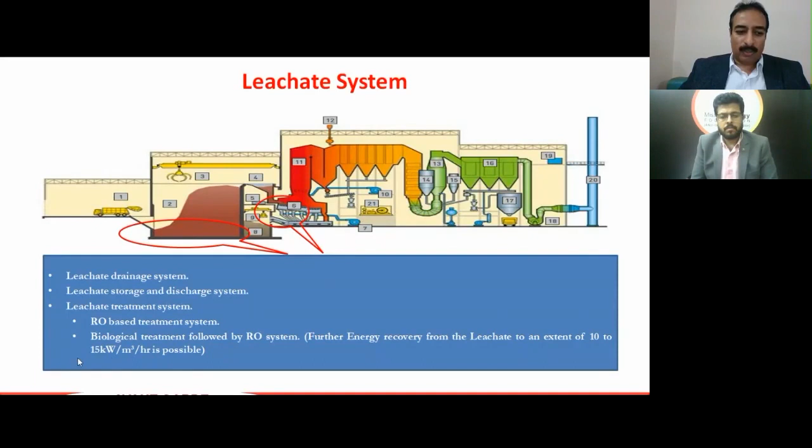In this process, some amount of power can be produced. It is estimated that around 15 kilowatts of power can be produced per meter cube per hour of leachate.

So, various waste to energy configurations: you have 1 boiler 1 TG configuration, 2 boiler 2 TG or 1 TG configuration, 3 boiler 1 TG, and 2 boiler 2 TG configuration. It all depends on flexibility and cost.

If you go for a plant less than 850 TPD, we can go for 1 boiler and 1 TG configuration. For one plant in Pune, 750 TPD, we went for 1 boiler 1 TG configuration. For above 850 TPD, like the plants at Delhi and Hyderabad, we go for 2 boiler and 1 TG configuration. Then at the Jindal plant, they went for 3 boiler and 1 TG configuration.

If your economics and cost works out, you can even go for 2 boiler and 2 TG configuration. Considering Indian conditions and economics, 1 boiler 1 TG and 2 boiler 1 TG configurations are widely followed in the Indian industry.

Typically a 300 TPD plant, depending on calorific value and seasonal variation, can produce power in the range of 4 to 6 megawatt. From 450 TPD, you can get around 6 to 8 megawatt. From 600 TPD, you can generate 8 to 12 megawatt. And from 750 TPD, you can generate 10 to 14 megawatt.

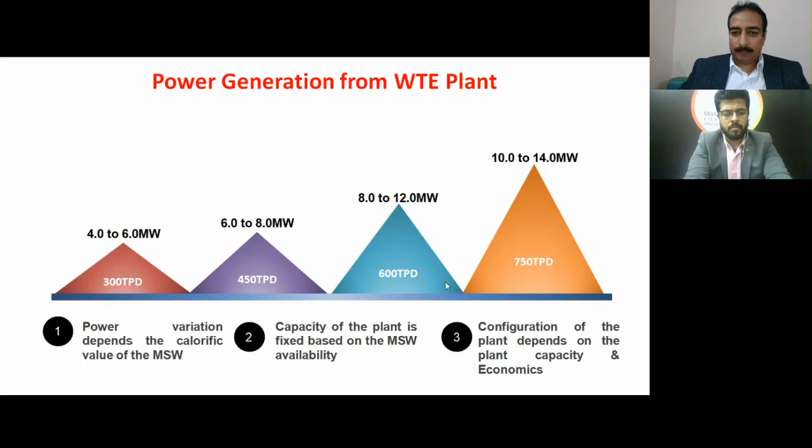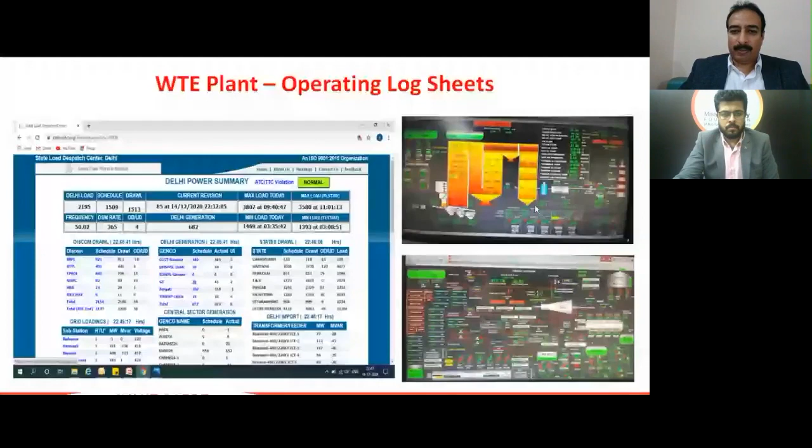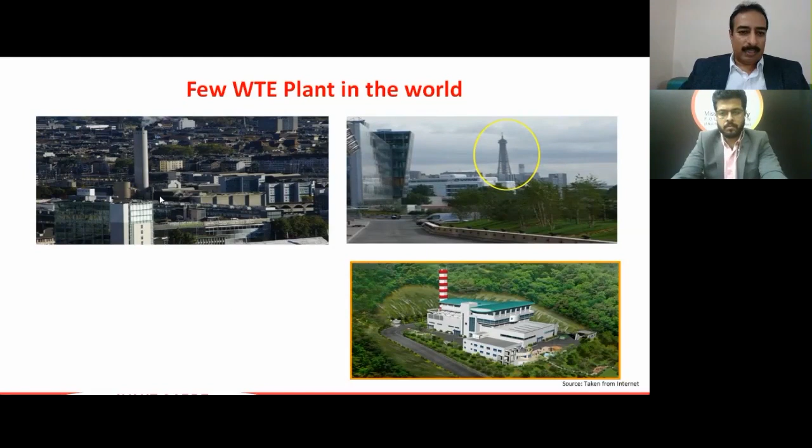These plants in various countries are even located at the heart of the city. If you see, this is a city where the waste to energy plant is located at the heart of the city. Similarly, here also it's like that.

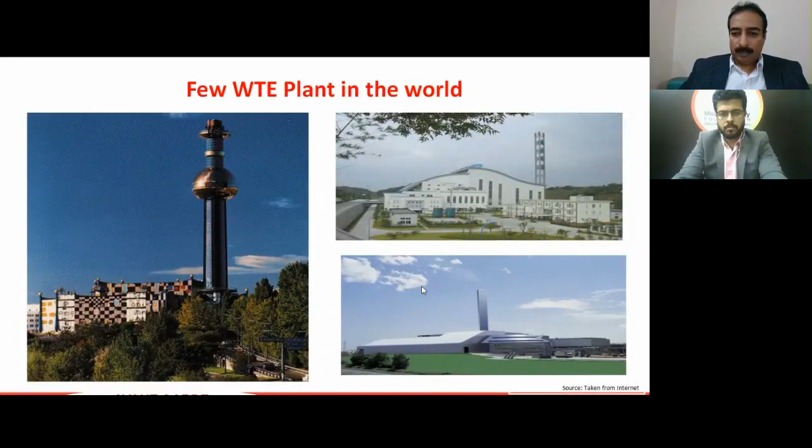These are some photos of installations worldwide. This plant is the one we have done for Delhi, the Ramky Enviro plant, for whom we are the consultant. This is a 24 megawatt waste to energy plant burning 1200 TPD of waste. This is another plant, I think it's the Jabalpur plant.

As a summary, this is a new beginning for a very old source. This direct mass incineration with energy recovery is one of the best waste to energy technologies suitable for wide varying fuel like MSW for effective disposal of waste. There are more than 1,000 waste to energy plants with this technology operating worldwide. In India, around more than 5 plants are in successful operation, and a few plants are under construction.

In the incineration technology, there is volume reduction to an extent of 90%, and gases are let out from the chimney satisfying pollution norms. Most of the ash from the waste to energy plant can be used. There is a power generation potential from MSW in the order of 270 to 445 kilowatt per ton per hour of MSW, depending on the lower calorific value of the MSW.